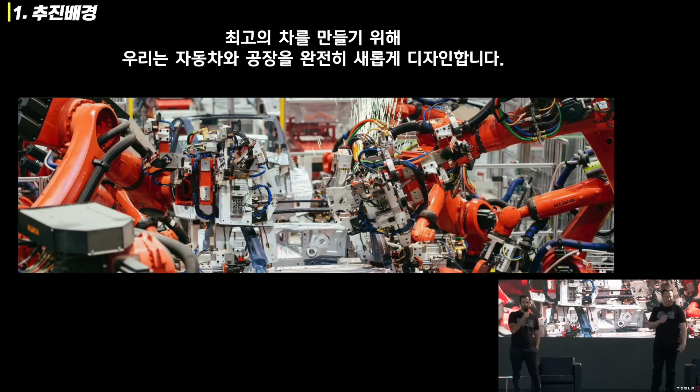EV market share is growing, but EVs still aren't accessible to all. And you can see, as Drew was saying, it's like starting to flatten out a little bit because the rate of improvement of the affordability of cars is just not fast enough. So that's why we got Battery Day. Yeah. To make the best cars in the world, we design vehicles and factories from the ground up. And now we do this for batteries as well. So let's get started. We have a plan to halve the cost per kilowatt hour. Yeah.

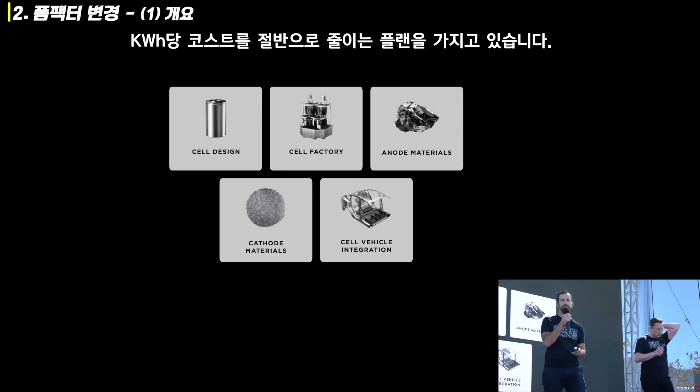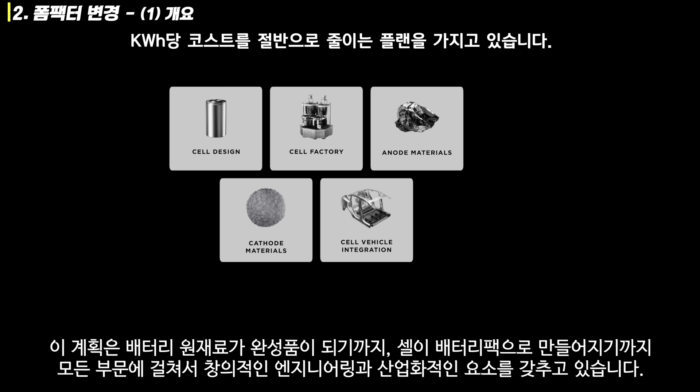And it's not a plan that rests on a single innovation, some research project that'll never see the light of day. It's a plan that has taken creative engineering and industrialization across every facet of what makes a cell into a battery pack, from raw material to the finished thing. And we're going to go through that plan with you today, step by step, and build up how we get to these goals and how we accelerate this transition and make our vehicles and our grid batteries more affordable.

I mean, we basically thought through every element of the battery, well, almost every element. There are a few more elements that we won't get to today, but we will get to in the future.

So first, before we get too far into it, let's talk about what is in a battery cell. We've got the cap and the can, negative and positive terminals of the cell. When you open that cell, you've got a tab connected to those terminals, what we call the jelly roll, which is the wound electrodes on the inside.

You can actually see what this looks like as you unwind it. This is over a meter long in a typical 2170 cell. So it's quite a long winding process. And you can see the tab still there.

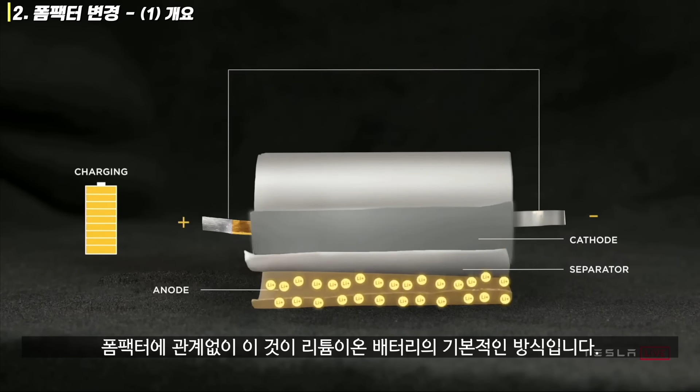And then, to explain what's actually going on here, we've identified anode, cathode, separator, positive and negative terminal. Discharge the cell, you've got lithium moving from anode to cathode. And then the reverse, when we charge the cell, lithium moving from cathode to anode across the separator. This is the basic of what makes all lithium-ion batteries, no matter what the form factor is.

And when we look at what's happened to date, at least in our products, we've moved from the 18650 form factor to the 2170 form factor through great collaboration with our partners, Panasonic, new partners like LG and CATL, and probably others in the future.

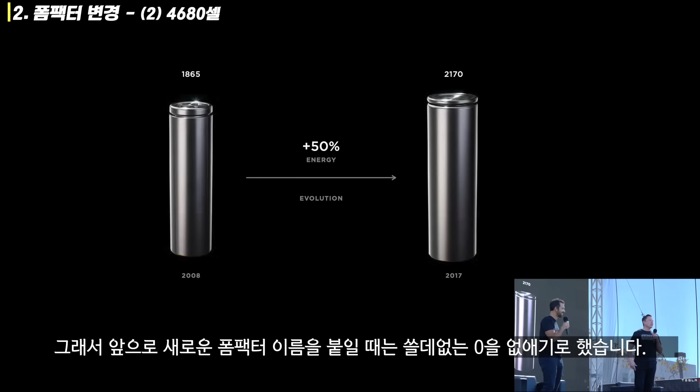Actually, a slight note on why it's called the 18650, although not on the slide, versus the 2170, is that the first two digits refer to the diameter, and the second two digits refer to the length. So that helps explain why these weird numbers. But nobody could explain to me why there was an extra zero. So I said, okay, well, we're deleting the zero that nobody can explain in future form factors. So technically it's like the 18650 bizarrely, but going forward it's the 2170 because we just got rid of the extra zero because it's pointless.

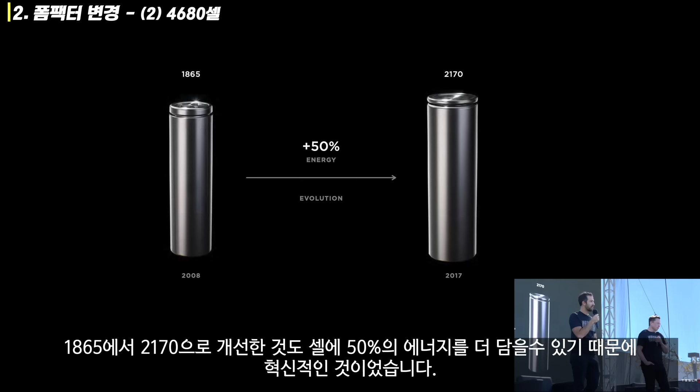This was an evolutionary step, going from 1865 to 2170, bringing 50% more energy into the cell. But when we look to the ideal cell design, if we were to do it ourselves, we need to go beyond just what's in front of us and study the full spectrum of options. So we swept the key figures of merit, how much we can reduce the cost, and how much vehicle range increases as we change the outer diameter of the cell. We found a sweet spot somewhere around 46 millimeters.

But it's not just about a bigger form factor. Like anybody could make a bigger form factor. Any fool could make a bigger form factor. We not any fool. Yeah, exactly.

There are problems as you make cells larger. In fact, supercharging and thermals in general become really challenging as you make bigger cells. And this was the challenge that our team set our sights on to overcome. And we did. We came up with this tabless architecture that maybe you've heard about, that basically removes the thermal problem from the equation and allows us to go to the absolute lowest cost form factor and the simplest manufacturing process.

This is what we mean when we talk about tabless. It's kind of a beautiful thing. Yeah, that's what these T-shirts mean, but it's very esoteric. It's like nobody could figure it out.

We basically took the existing foils, laser patterned them, and enabled dozens of connections into the active material through this shingled spiral you can see.

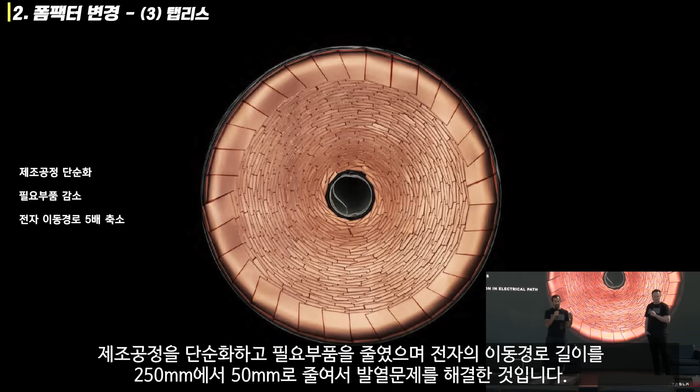With simpler manufacturing, fewer parts, 50 millimeter versus 250 millimeter electrical path length, which is how we get all the thermal benefits. This is important to appreciate. Basically the distance that electron has to travel is just much less. You actually have a shorter path length in a large tabless cell than you have in the smaller cell with tabs.

This is a big deal. So even though the cell is bigger, it actually has more power. The power to weight ratio is actually better than the smaller cell with tabs. This is quite hard to do.

Nobody's done it before. So it really took a tremendous amount of effort within Tesla engineering to figure out how do we make a freaking tabless cell and have it actually work and then connect that to the top cap. There's a whole bunch of things that we're keeping a little secret sauce here that we're not telling everything. But sometimes what's elegant and simple is still hard, and it took us a lot of trials, but we're happy where we ended up. Everything's simple in recollection. Everything is hard until it's discovered, and then it's simple.

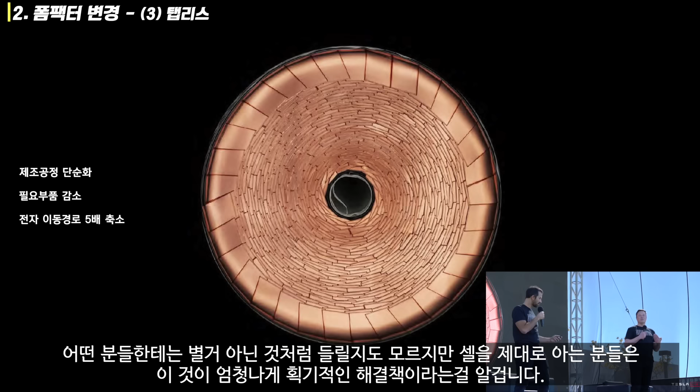But anyway, there's a lot of really cool things going on that enable tabless cells, and due to a really great engineering team, Drew and the rest of the team have done amazing work in achieving this tabless construction. I think it may sort of sound a bit silly to some people, but for people that really know cells, this is a massive breakthrough. For cylindricals to be able to get rid of the tabs dramatically simplifies winding and coating, and has an awesome thermal and performance benefit.

Elaborate on that a bit. It's like when the cell is going through the system, it has to keep stopping where all the tabs are. So you can't do continuous motion production if you have tabs. You have to keep stopping, and then there's a rate at which you can start and stop and accelerate again, and it really slows down the rate of production.

And then sometimes you get the tabs wrong, and you also lose a little bit of active area. It's really a huge pain in the ass to have tabs from a production standpoint. And so when we put it all together and go to our new 80 millimeter length, 4680, we call this new cell design, we get 5 times the energy with 6 times the power and enable a 16% range increase just from form factor alone.

And just to clarify, when we see these plus 16% or whatever the percentage range increases, these are the amounts due just to that particular innovation. So we'll list a whole bunch of innovations, and then when you add them up, you get a total improvement in energy density and cost. But these numbers refer to just this thing.

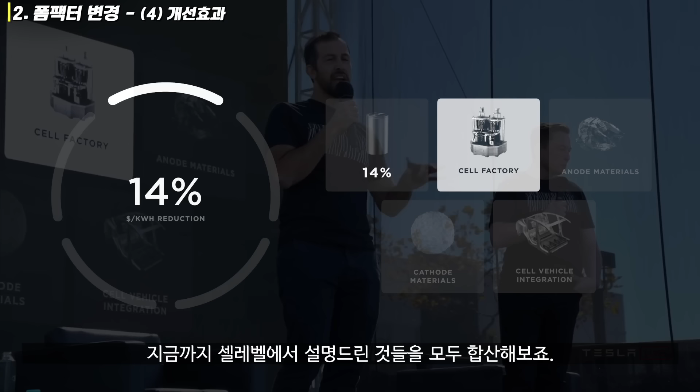But let's stack up everything we just saw at the cell level. Just the cell form factor change enables a 14% dollar per kilowatt hour reduction, just that cell form factor change. And now that you've been teased on this factory, we're going to go on and walk step by step through that factory and discuss a series of innovations there.

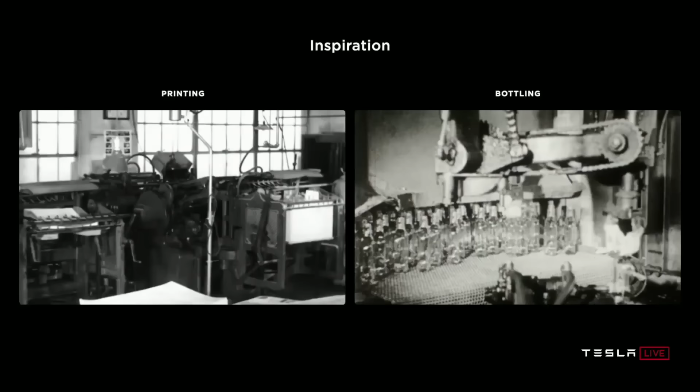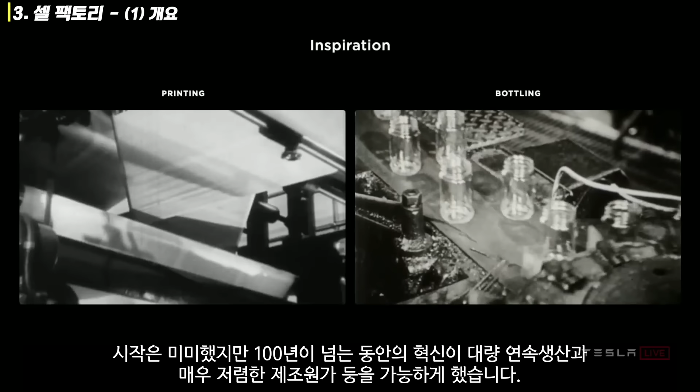When thinking about the ideal cell factory, we have inspirations behind us in the printing and bottling industry, where from humble beginnings, over a century of innovation has enabled mass-scale, continuous motion, unbelievably low manufacturing cost. And when we think about the lithium-ion industry, which is really only in its 3rd decade of high-volume production, it has so far to go to achieve similar scale and simplicity. That was the inspiration that we set out to the team as we thought about how to marry cell design and manufacturing in the best possible factory.

Let's talk a little bit about what's in a cell factory. First, there's an electrode process where the active materials are coated into films onto foils. Then those coated foils are wound in the winding process we just talked about, where if you do have tabs, you have to start and stop a lot. Then the jelly roll is assembled into the can, sealed, filled with electrolyte, and then sent to formation, where the cell is charged for the first time, and where the electrochemistry is set and the quality of the cell is verified. We set out at every step of this process to try to take that inspiration and think about how we make those processes fundamentally better and more scalable.

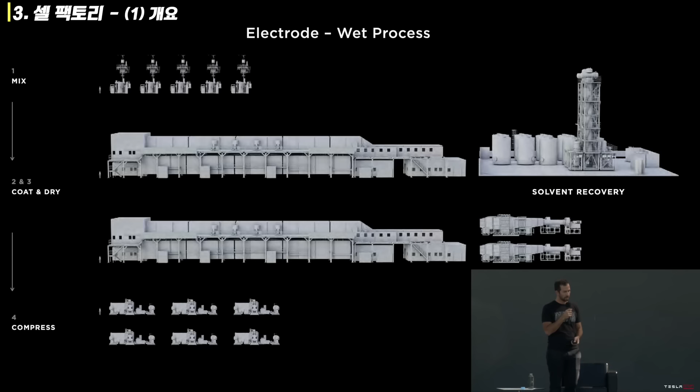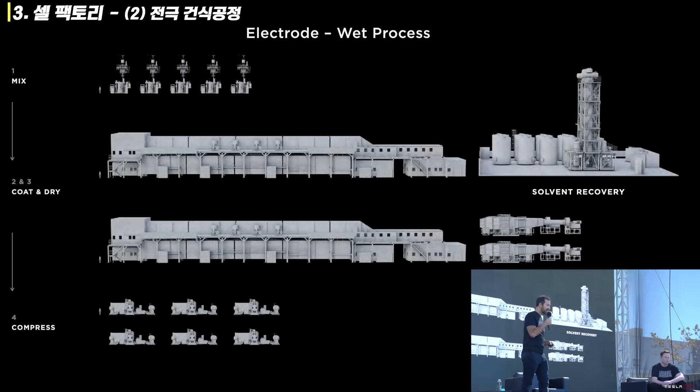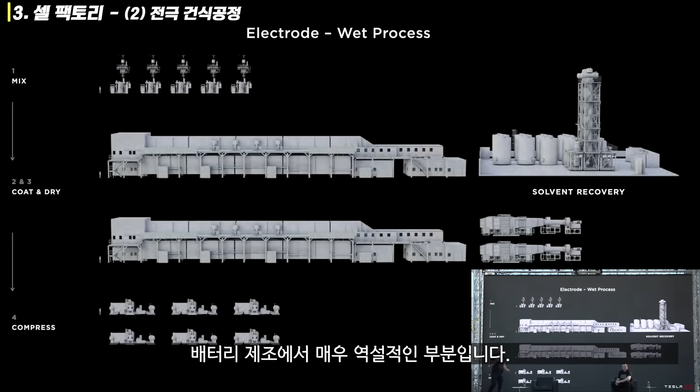One of the most important processes is where it all begins, the wet process of the electrode coating. Just to give you a sense of scale, I'm going to walk through what's in that wet process. You've got mixing where the powders are mixed with either water or solvents for the cathode. That mix then goes into a large coat and dry oven where the slurry is coated onto the foil, huge ovens, tens of meters long, dried, and that solvent then has to be recovered. You can see the solvent recovery system. Finally, the coated foil is compressed to the final density. When you're looking at this, you're like, wow, that's a lot of equipment for one step, especially when you consider that little speck next to the coating oven is a person. This is serious iron involved in making batteries.

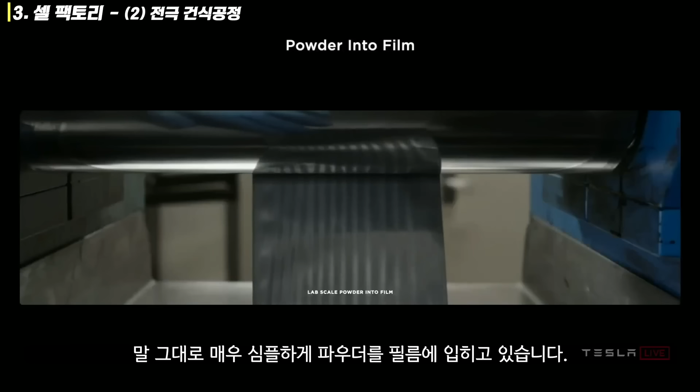Wouldn't it be great if we could skip that solvent step, which is one of those dig a ditch and then fill it kind of things, where you put the solvent in and then take it out and recycle it, and just go straight to dry mix to coat? That's what the dry process is really about. In the most basic form, you can see it here on a bench top. Literally, powder into film, as simple as that. I mean, it's hard, actually, to be clear. If this was easy, everyone would do it. So it's not like dry coating electrode is actually easy. It's actually very hard to do what appears to be a simple thing.

We did acquire Maxwell a little over a year ago, I guess. It's certainly a good company, but the dry coating they had was like, I would call it proof of concept. Since the acquisition, we've actually revved the machine that does the dry coating 4 times. So we're on revision 4 post acquisition of the machine, and there's still a lot of work to do. I would not say this is completely in the bag. There's still a lot of work to do, and as you go from bench top to lab to pilot to volume production, there are actually major issues that you encounter at every level. It's not like you make something work on your bench and bingo, now you can make a bazillion of it. Absolutely, it's insanely difficult to scale up.

But if you do scale it up, what you saw before becomes this. So you can see the motivation: a 10 times reduction in footprint, a 10 times reduction in energy, and a massive reduction in investment. But as Elon was saying, simple is hard.

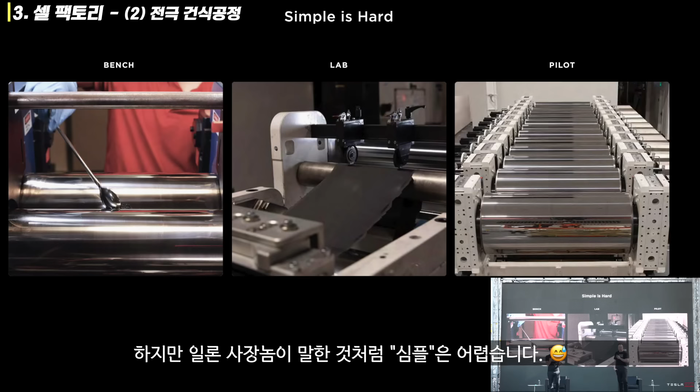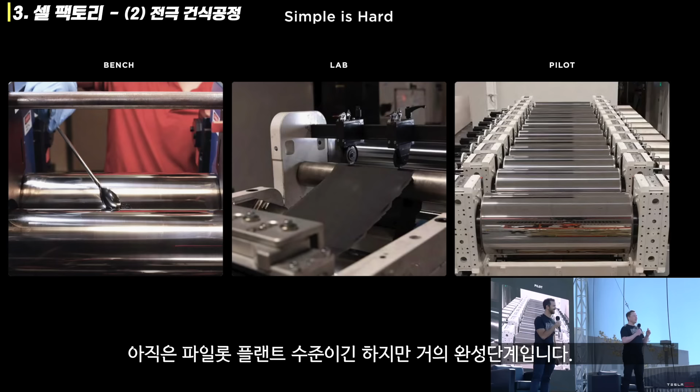Yeah, I mean, to be clear, I would not say that right now it's just totally working. It's close to working, but even now, at the pilot plant level, it is close to working. Well, it's fair to say it does work, but with not a high yield. Yeah, so we're still ironing out the kinks, but we've made tens of thousands of cells, thousands of kilometers of electrode. We are on the 4th generation of the equipment, so we've learned a lot along the way.

It's super demanding because every atom has its place if you want to deliver the energy density, the cycle life, and the supercharging. But we're confident that we will get there, though it will be a lot of work along the way. There's a clear path to success, but a ton of work between here and there.

This is a really profound improvement. Again, for people that know battery manufacturing, this is gigantic. We'll probably be on machine revision 6 or 7 by the time we do large-scale production. The rate at which the machines are being improved is extremely rapid, literally every 3 or 4 months is a new rev.

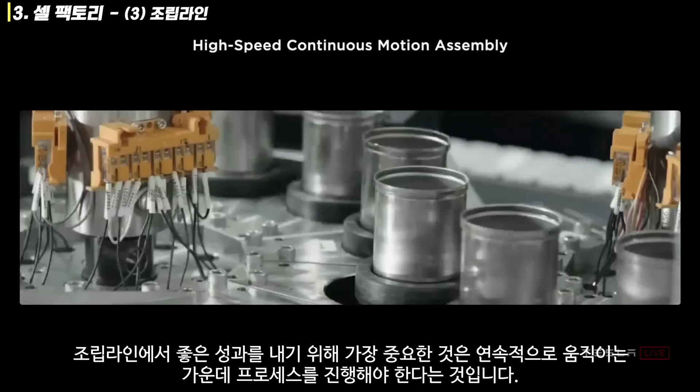Beyond the electrode, we continue to innovate on every other process step. So let's talk a little bit about assembly, which is next. The key to a high-performing assembly line is accomplishing processes while in continuous motion, thinking of the line as a highway: max velocity down the highway, no start and stop, no city driving. Exactly, no stoplights or traffic lights or anything.

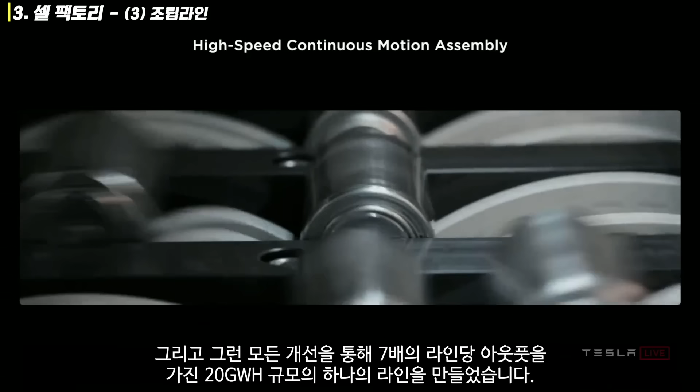Together with our internal design team that makes and designs this equipment, we coupled thinking about how to make the best cell with thinking about how to make the best equipment, so that we could accomplish the fastest parts-per-minute rates on all of these tools. Through all of that development, we were able to get to the point where we can implement assembly lines: one line, 20 gigawatt hours, a 7 times increase in output per line.

When you're thinking about scalability and pure effort, having one line be 7x the capability is just effort multiplying.

You can think about the fundamental physics of a factory almost like the rocket equation, where you've got your exhaust velocity and the log of the start and end masses. It's basically saying how fast are things going, and what percentage of the factory volume is doing useful work. Conveyance does not count as useful work, so only the value-added steps matter.

If you break the factory down into cubic meter sections, or smaller, say one liter sections, and ask is a majority of this volume doing useful work, you'd be astounded at how bad most factories are. They're maybe 2 or 3%, including our factory in Fremont. I think it's possible to get to at least 10 times that volumetric efficiency, more like 30% ish, maybe more, which means the factory can be 10 times smaller.

The other thing is how fast things go through the factory, it's speed and density. The faster you go, a factory moving at twice the speed of another is basically equivalent to two factories. The company that will be successful is the one that with one factory can accomplish what other companies take 2, 3, or 4 factories to do. So what we're trying to do here is say, okay, how do we with one factory achieve what maybe 5 or even 10 factories would normally be required to achieve?

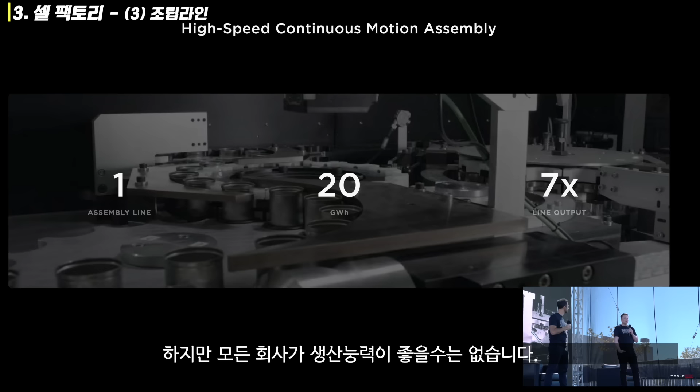Basically, Tesla is aiming to be the best at manufacturing of any company on Earth. This is the thing that's actually most important in the long run, I think, just from a company standpoint and from achieving sustainability as fast as possible. But I think also for long-term competitiveness, eventually every car company will have long-range electric cars, eventually every company will have autonomy, but not every company will be great at manufacturing. Tesla will be absolutely head and shoulders above anyone else in manufacturing. That is our goal.

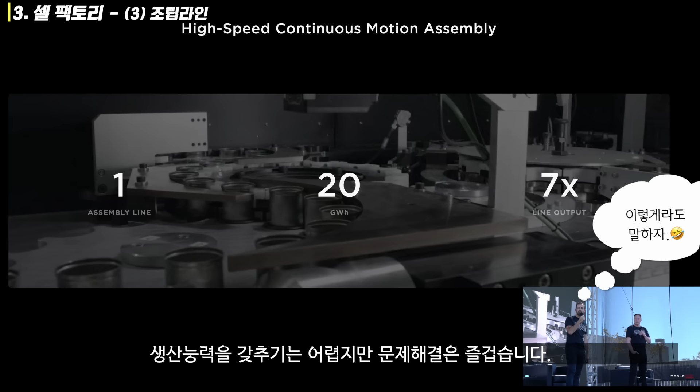Manufacturing is hard, and hard problems are fun to solve. Okay, now let's talk about formation.

In a typical cell factory, formation represents 25% of the investment. And what is formation? It's charging and discharging cells and verifying the quality of the cell. Turns out we've charged and discharged billions and billions of cells in our vehicles, so we know a thing or two about that. The typical formation setup is you charge and discharge each cell individually.

In our car, we charge thousands of cells at once. And we took our principle and our power electronics, leveraging Powerwall, vehicle battery management systems, and others, to dramatically improve the formation equipment cost effectiveness and density. That's an 86% reduction in formation investment, and a 75% reduction in footprint.

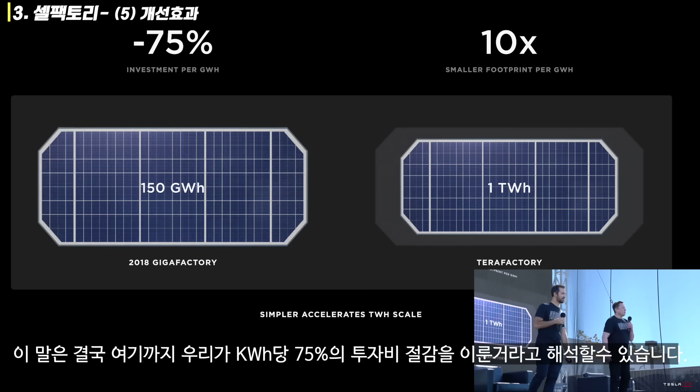So essentially, what this translates to, based on what we know today, is about a 75% reduction in the investment per kilowatt hour or gigawatt hour. It's basically 4 times better than the current state of the art, to the best of our knowledge. And I think there's probably room to improve even beyond that.

Definitely, yeah. We're able to, from a volume standpoint, actually get in a smaller form factor than Giga Nevada. We were able to get many times the cell output. So you can see, basically, we can get a terawatt hour in less space than it took to make a gigawatt hour, 150 gigawatt hours. So this is pretty profound.

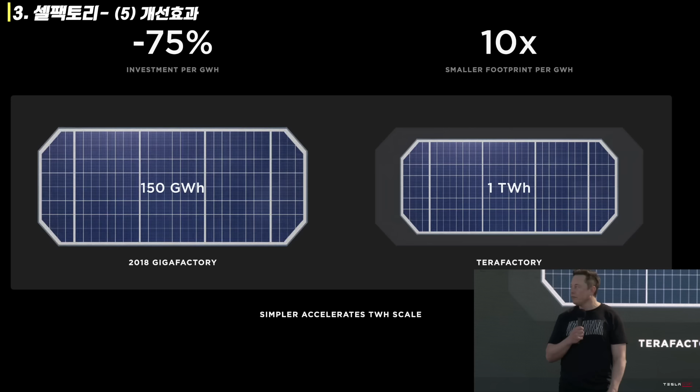It's like I would actually not have thought this was possible several years ago, that we could actually get to terawatt hour scale in less space than what we currently envision for doing 150 gigawatt hours. Yes, simpler accelerates terawatt hour scale, and that's what we need to do to accelerate our mission.

This is just talking about Tesla internal cell production. As I tweeted out earlier, we will continue to use our cell suppliers, Panasonic, LG, and CATL. Essentially, this does reduce our weighted average cost of a cell, because it allows us to make a lot more cars and a lot more stationary storage.

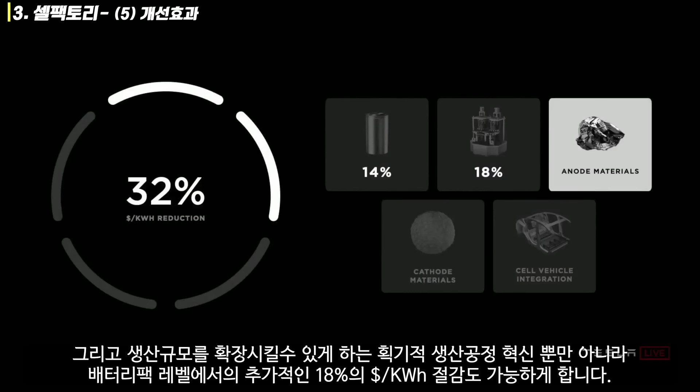And not only is all of that manufacturing innovation fantastic for enabling scale, it's also an additional 18% reduction in dollar per kilowatt hour at the battery pack level. But wait, there's more. But wait, there's more.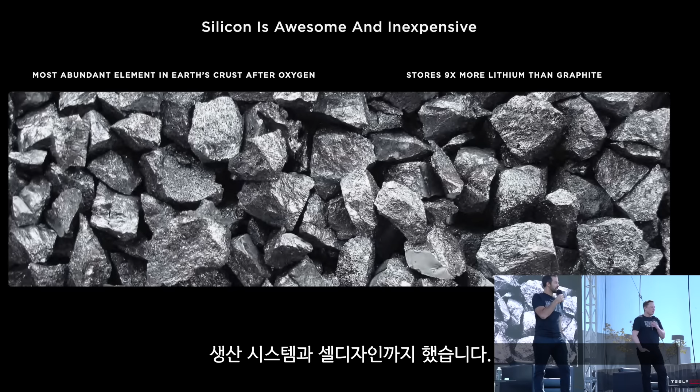So we have a manufacturing system. We've got a cell design. What are the active materials we're going to put in that cell design? Let's talk about the anode first. Let's talk about silicon. Why is silicon awesome?

It's awesome because it's the most abundant element in the Earth's crust after oxygen, which means it's everywhere. It's sand. Sand is silicon dioxide. And it happens to store 9 times more lithium than graphite, which is the typical anode material in lithium-ion batteries today. So why isn't everybody using it?

The main reason is because the challenge with silicon is that it expands 4x when fully charged with lithium. And basically, all of that expansion stress on the particles starts cracking them, they start electrically isolating, you lose capacity, the energy retention of the battery starts to fade. And current approaches to solve this, which exist—I mean, we have silicon in the cars that you're all in right now—involve highly engineered, expensive materials.

In the scheme of things, they're still great, and they enable some of the benefits of silicon. They just don't enable all of it, and they're not scalable enough. You can see some of the things that maybe you've heard of, SiO, silicon with carbon, or silicon nanowires. That's kind of the space right now.

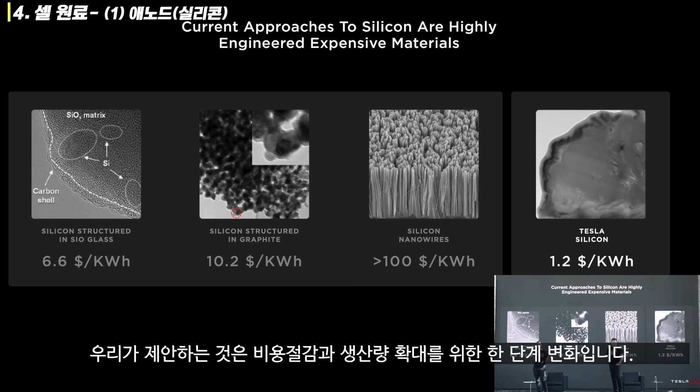What we're proposing is a step change in capability and a step change in cost. And what that really is, is to just go to the raw metallurgical silicon itself. Don't engineer the base metal. Just start with that and design for it to expand in how you think of the particle in the electrode design and how you coat it.

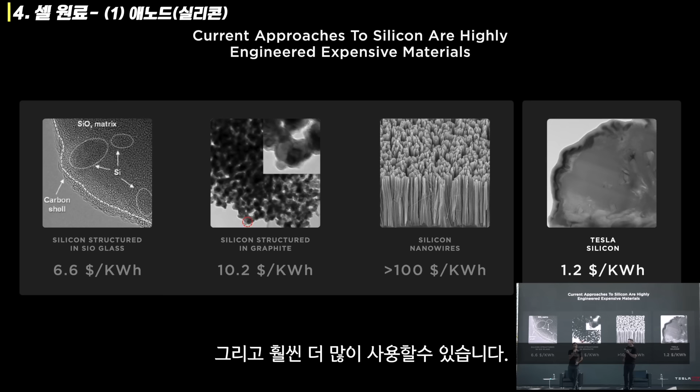Yeah, I'm not sure if you saw this. Basically, $1 per kilowatt hour. Yeah, basically, if you use simple silicon, it's dramatically less than even the silicon that is currently used in the batteries that are made today, and you can use a lot more of it. The anode would cost, with this silicon, $1.20 a kilowatt hour.

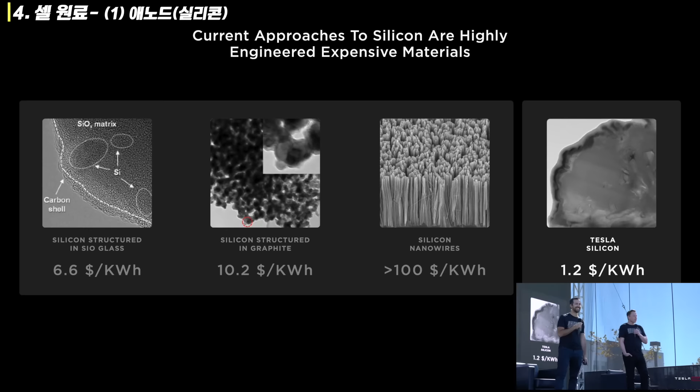Yeah. And how does it work? Start with raw metallurgical silicon, stabilize the surface with an elastic ion-conducting polymer coating that is applied through a very scalable approach. No chemical vapor deposition, no highly engineered high capex solutions, and then integrated into the electrode through a robust network formed out of a highly elastic binder.

And in the end, by leveraging this silicon to its potential, we can increase the range of our vehicles by an additional 20%, just this improvement. Yeah, it gets cheaper and longer range. Yeah, and when we take that anode cost reduction, we're looking at another 5% dollar per kilowatt hour reduction at the battery pack level. Let's talk about cathodes.

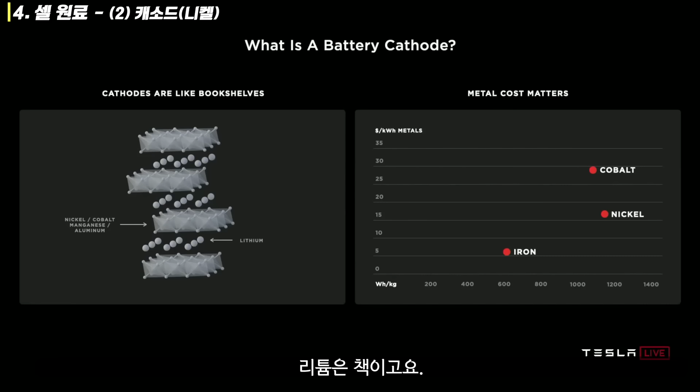What is a battery cathode? Cathodes are like bookshelves, where the metal, the nickel, the cobalt, the manganese, or aluminum is like the shelf, and the lithium is the book. And really, what sets apart these different metals is how many books of lithium they can fit on the shelves and how sturdy the shelves are. Cobalt is a... Yeah, sorry, I was just going to say, it's tough to exactly figure out what the right analogy is to explain cathode and anode, but a bookshelf is probably a pretty good one, in the sense that you need a stable structure to contain the ions.

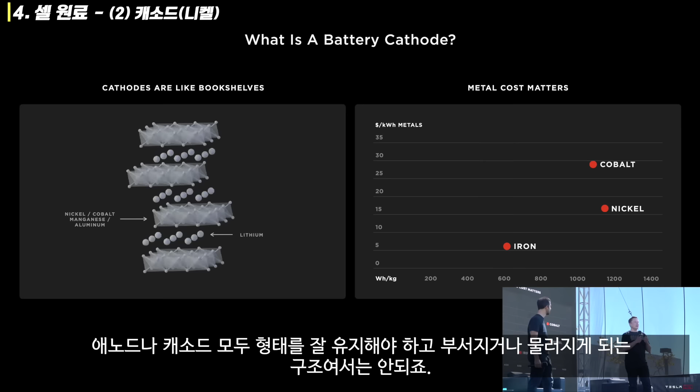So you want a structure that does not crumble or get gooey, or basically that holds its shape in both the cathode and the anode. As you're moving these ions back and forth, it needs to retain its structure. So if it doesn't retain its structure, then you lose cycle life and your battery capacity drops very quickly. People are always talking about what's the cathode going to be? Is it NCA or whatever?

The thing to consider is just fundamentally what the metals are capable of, and that's what we have on the chart here. Dollar per kilowatt hour cathode of just the metal, using just LME, London Metal Exchange prices, versus the energy density of just the cathode. And you can see nickel is the cheapest and the highest energy density, and that's why increasing nickel is a goal of ours and really everybody's in the battery industry.

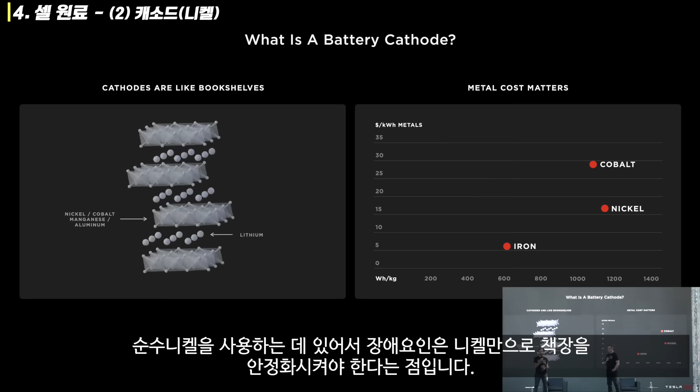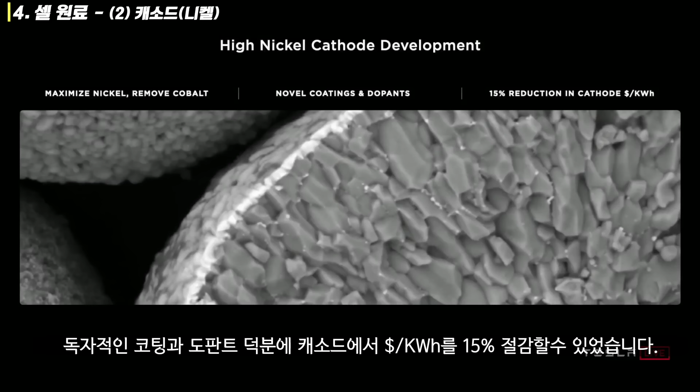But one of the reasons why cobalt is even used at all is because it is a very stable bookshelf. And the challenge with going to pure nickel is stabilizing that bookshelf with only nickel. And that's what we've been working on with our high nickel cathode development, which has 0 cobalt in it. Leveraging novel coatings and dopants, we can get a 15% reduction in cathode dollar per kilowatt hour. Yeah. Big deal.

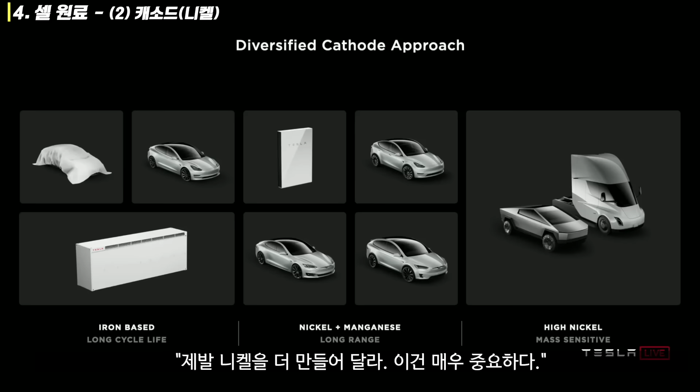But it's not just about nickel. In order to scale, we really need to make sure that we're not constrained by total nickel availability. I actually spoke with the CEOs of the biggest mining companies in the world and said, please make more nickel. It's very important. And so I think they are going to make more nickel.

I think we need to have a kind of a 3-tiered approach to batteries. So starting with iron, that's kind of like a medium range, and then nickel manganese as sort of a medium plus, intermediate, and then a high nickel for long range applications like Cybertruck and the semi. Because something like a semi truck, it's extremely important to have high energy density in order to get long range.

If you look at the watt-hours per kilogram at the cathode level of iron, it looks like nickel's twice as good. But when you fully consider it at the pack level, everything else taken into account, nickel is maybe 50 or 60% better than iron. So iron is a little better than it would seem when you look at it at the pack level fully considered. It's not as good as nickel, but it's actually pretty good. And so good for stationary storage and for medium range applications where energy density is not paramount.

And then, like I said, for intermediate, it's kind of a nickel manganese, and it's relatively straightforward to do a cathode that's 2/3 nickel, 1/3 manganese, which would then allow us to make 50% more cell volume with the same amount of nickel. And with very little energy trade-off. Just enough that you still want to use 100% nickel for something like a semi-truck, but really not much of a sacrifice at all.

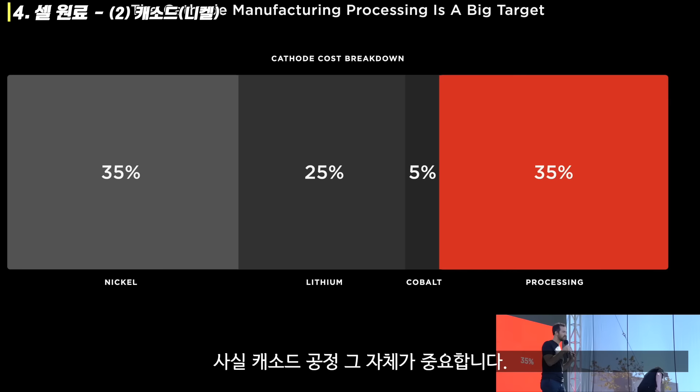35% of the cathode dollar per kilowatt hour is just in transferring it into its final form. And so we see that as a big target, and we decided to take that on. Here's a view of the traditional cathode process. Effectively, if you start at the left and you have the metal from the mine, the first thing that happens is the metal from the mine is changed into an intermediate thing called a metal sulfate, because that just happened to be what chemists wanted a long time ago.

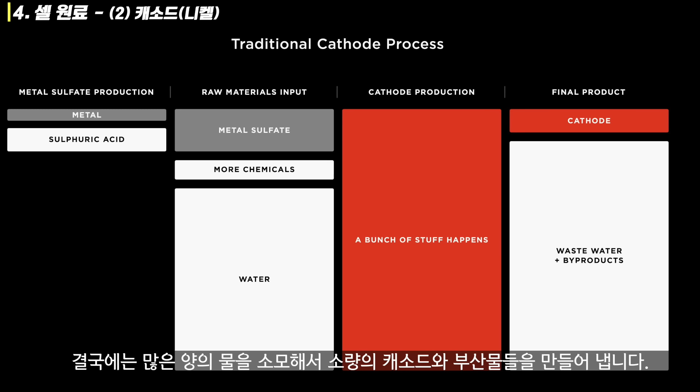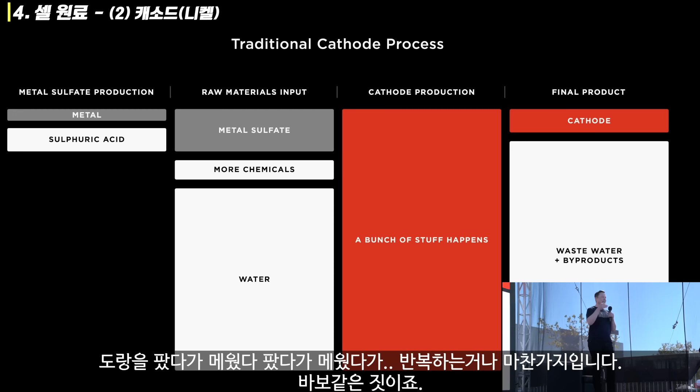And then when you're making the cathode, you have to take this intermediate thing called metal sulfate, add chemicals, add a whole bunch of water, a whole bunch of stuff happens in the middle, and at the end, you get that little bit of cathode and a whole bunch of wastewater and byproducts. Yeah, it's insanely complicated. It's a small world journey of I am a nickel atom. What happens to me? And it's crazy. Like you're going around the world 3 times. There's like the moral equivalent of dig the ditch, fill in the ditch, and dig the ditch again. It's total madness, basically.

And these things just grew up as kind of legacy things, like how it was done before. And then they connected the dots, but really didn't think of the whole thing from a first principles standpoint, saying how do we get from the nickel ore in the ground to the finished nickel product for a battery. And so we've looked at the entire value chain and said, how can we make this as simple as possible? And that's what we're proposing here with our process.

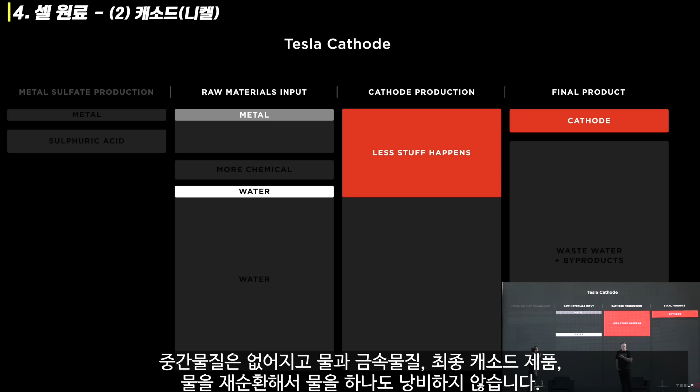As you can see, a whole lot less is going on here. We get rid of the intermediate: metal, water, final product cathode, recirculate the water, no wastewater at all. And when you summarize all of that, it's a 66% reduction in CapEx investment, a 76% reduction in process cost, and 0 wastewater. Much more scalable solution. Yeah.

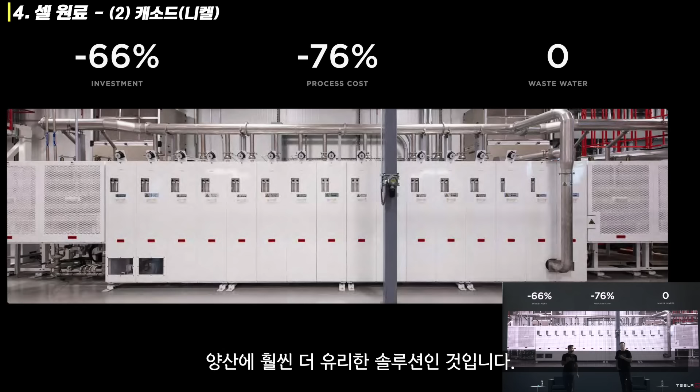And then when you think about the fact that now we're actually just directly consuming the raw metal nickel powder, it dramatically simplifies the metal refining part of the whole process. So we can eliminate billions in battery-grade nickel intermediate production. It's not needed at all. And we can also use that same process we showed on the previous page to directly consume the metal powder coming out of recycled electric vehicle and grid storage batteries. So this process enables both simpler mining and simpler recycling.

And now that we have this process, obviously we're going to go and start building our own cathode facility in North America and leveraging all of the North American resources that exist for nickel and lithium. And just by localizing our cathode supply chain and production, we can reduce miles traveled by all the materials that end up in the cathode by 80%, which is huge for cost. Yeah, to be clear, cathode production would be part of the Tesla cell production plant.

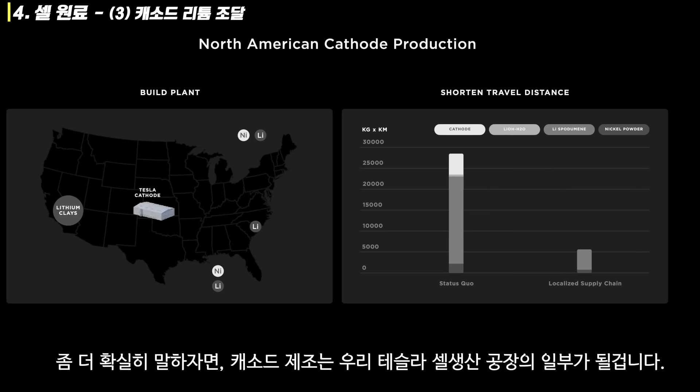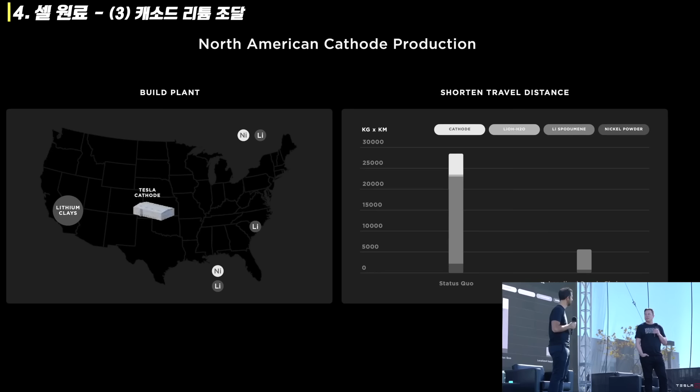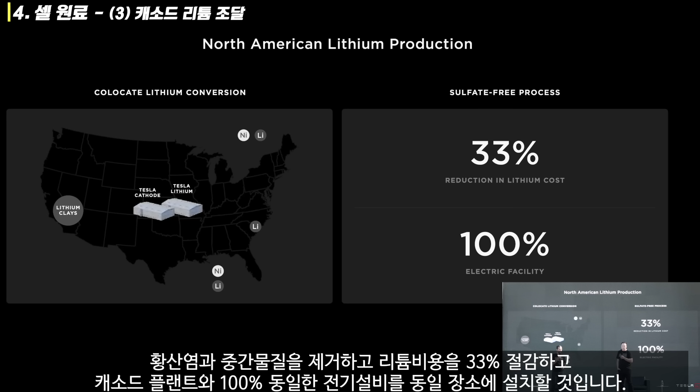So it would just be, basically, raw materials coming from the mine, and out comes a battery. The way the lithium ends up in the cell is through the cathode, so then we should obviously do on-site lithium conversion as well, which is what we will do using a new process that we're going to pioneer. That's a sulfate-free process, again, skip the intermediate. 33% reduction in lithium cost, 100% electric facility co-located with the cathode plant. Yeah.

So it's important to note that there is a massive amount of lithium on Earth. Lithium is not like oil. There's a massive amount of it pretty much everywhere. In fact, there's enough lithium in the United States to convert the entire United States fleet to electric, like all the cars in the United States, there's like 300 million or something like that. Every vehicle in the United States can be converted to electric using only lithium that is available in the United States, discovered today, what we already know exists. People really haven't even been looking because it's just widely available.

But it is important to ask, what is the smartest way to take the ore and extract the lithium and do so in an environmentally friendly way? And we actually discovered, again looking from a first principles physics standpoint instead of just the way it's always been done, that we can actually use table salt, sodium chloride, to basically extract the lithium from the ore.

Nobody's done this before. To the best of my knowledge, nobody's done this. And all the elements are reusable. It's a very sustainable way of obtaining lithium. And we actually got rights to a lithium clay deposit in Nevada. Over 10,000 acres.

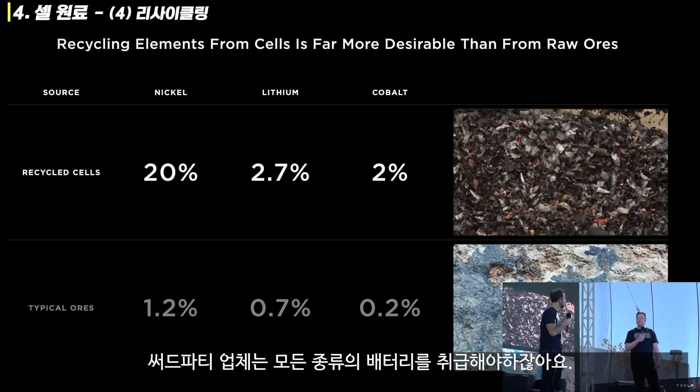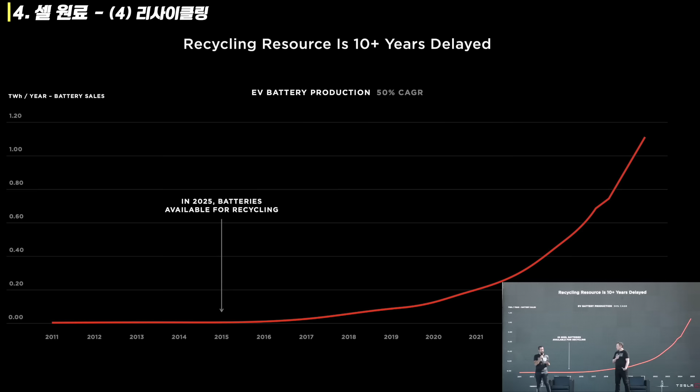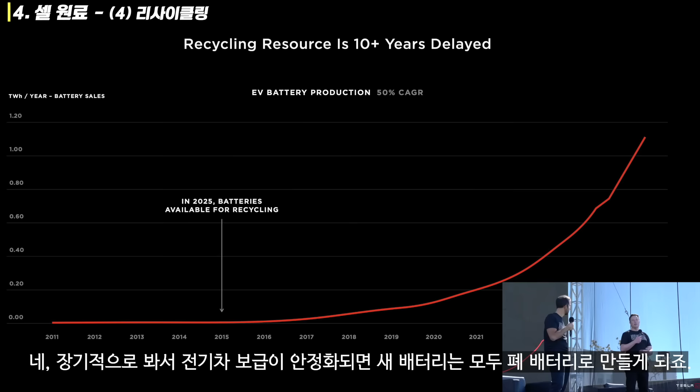Yeah, and just to think about what this actually means, the recycling resource is always 10 or greater years delayed because batteries last a really long time. But eventually, it is the way that all resources will be made available, and that's why we're investing in this recycling facility in Nevada. Yeah. Long-term, new batteries will come from old batteries once the fleet reaches steady state.

Right. Okay, so we just talked about scaling cathode and recycling. All of the benefits that you just saw are added to this benefit of a 12% reduction in dollars per kilowatt hour at the battery pack level. Almost at our half the cost goal, but there's one more section. Take it away, Elon. Great.

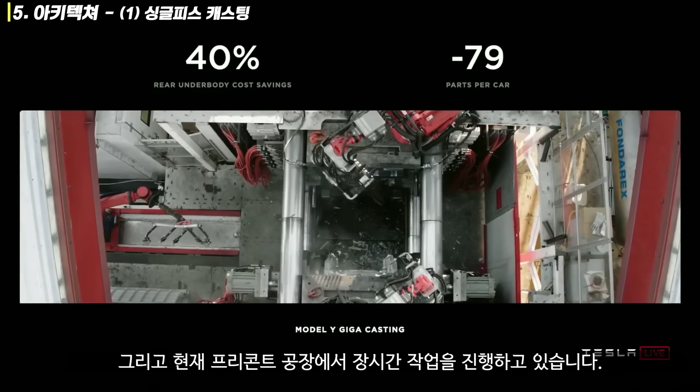So there's an architecture that we've been wanting to do at Tesla for a long time, and we finally figured it out, and I think it's the way that all electric cars in the future will ultimately be made. It's the right way to do things. So it starts with having a single piece casting for the front body and the rear body. And in order to do this, we commissioned the largest casting machine that has ever been made, and it's currently working just over the road at our Fremont plant. It's pretty sweet.

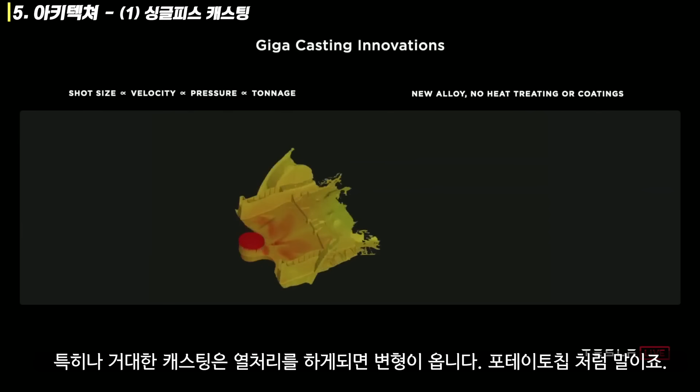Currently making the entire rear section of the car as a single piece, high pressure die cast aluminum. And in order to do this, we actually had to develop our own alloy because we wanted a high strength casting alloy that did not require coatings or heat treatment. This is a big deal for castings, especially with a large casting. If you heat treat it afterwards, it tends to deform. It kind of does this potato chip thing. So it's very hard to keep a large casting to have its shape. There was no alloy that existed that could do this. So we developed our own alloy, a special alloy of aluminum that has high strength without heat treat and is very castable.

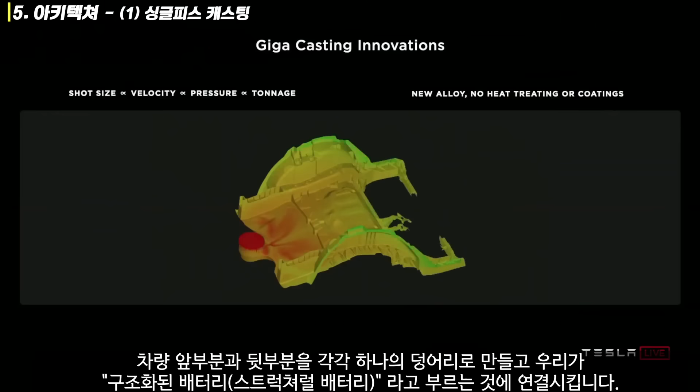So that's a great achievement of our materials team. In fact, in general, we've got a lot of advanced materials coming for Tesla, new alloys and materials that have never existed before. So you're basically making the front and rear of the car as a single piece, and that then interfaces to what we call the structural battery, where the battery for the first time will have dual use.

The battery will both have the use as an energy device and as structure. This is absolutely the way things are done. In the early days of aircraft, they would carry the fuel tanks as cargo. The fuel tanks actually were quite difficult to carry. They were basically worse than cargo. You had to kind of bolt them down. It was very difficult. And then somebody said, 'Hey, what if we just make the wing tanks? What if we just make the fuel tank in wing shape?' All modern airplanes, the fuel tank, your wing is just a fuel tank in wing shape.

This is absolutely the way to do it. And then the fuel tank serves as dual structure, and it's no longer cargo. It's fundamental to the structure of the aircraft. This was a major breakthrough. We're doing the same for cars.

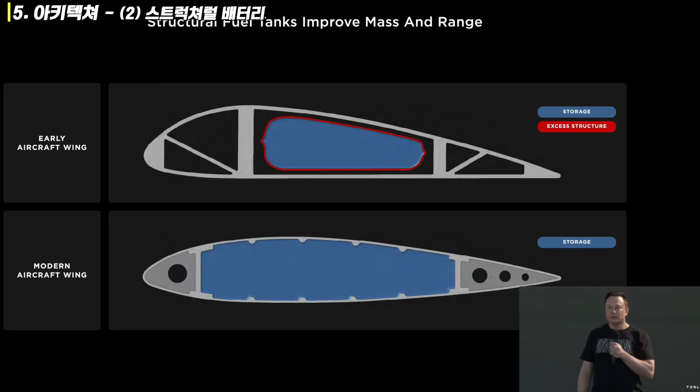This is really quite profound. Effectively, the non-cell portion of the battery has negative mass. So we save so much mass in the rest of the vehicle. We save more mass in the rest of the vehicle than the non-cell portion of the battery. It's like, well, how do you really minimize the mass of a battery? Make it negative. Make the non-cell portion of the battery pack negative.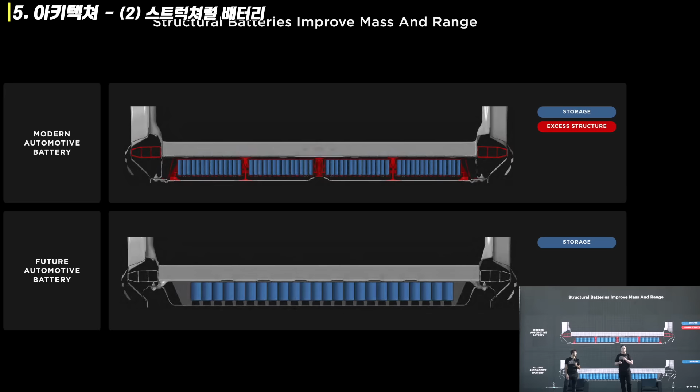It also allows us to pack the cells more densely because we do not have intermediate structure in the battery pack. Instead of having supports and stabilizers and stringers and structural elements in the battery, we now have a lot more space because the pack itself is structural. Instead of having just a filler that is a flame retardant, which is currently what is in the 3 and Y battery packs, we have a filler that is a structural adhesive, as well as flame retardant. So it effectively glues the cells to the top and bottom sheet, and this allows you to do shear transfer between the upper and lower sheet.

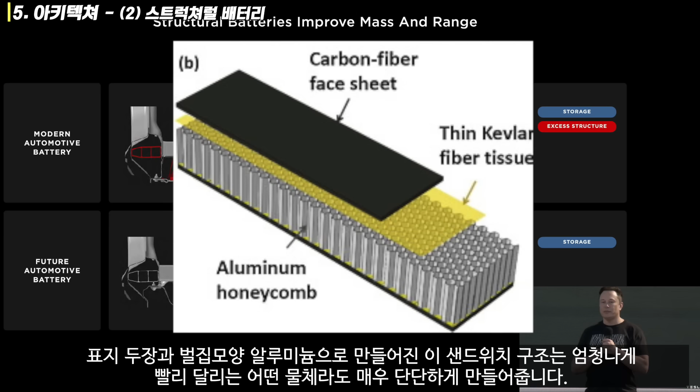Just like if you have a Formula One craft or a racing boat, with carbon fiber face sheets and aluminum honeycomb between them, this gives you incredible stiffness, and it's really the way any super fast thing works. You create basically a honeycomb sandwich with two face sheets. This is actually even better than what aircraft do, because aircraft can't do this, since fuel is liquid. In our case, the batteries are solid, so we can actually use the steel shell case of the battery to transfer shear from the upper and lower face sheet, which makes for an incredibly stiff structure, even stiffer than a regular car.

In fact, if this was a convertible that had no upper structure, that convertible would be stiffer than a regular car. So it's just really, really major.

So it improves the mass efficiency of the battery, and then those castings are also quite important because you want to transfer load into the structural battery pack in a very smooth, continuous way, so you don't put arbitrary point loads into the battery. You kind of have to feather the load out from the front and rear into the structural battery.

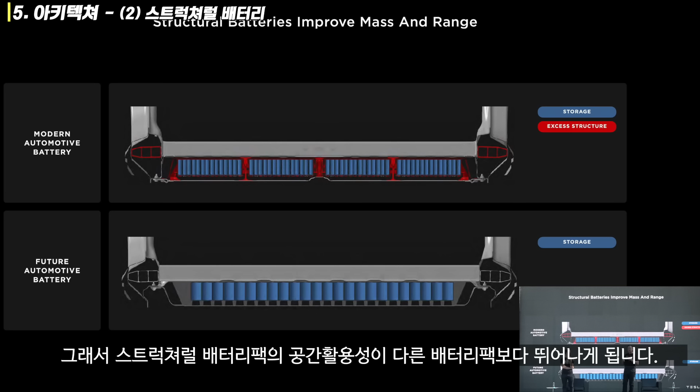It also allows us to move the cells closer to the center of the car, because we don't have all the supports and stuff. So the volumetric efficiency of the structural pack is much better than a non-structural pack, and we actually bring the cells closer to the center, and because they're closer to the center, it reduces the probability of a side impact potentially contacting the cells, because any kind of side impact has to go further in order to reach the cells.

It also improves what's called the polar moment of inertia, which is like when an ice skater has arms out or arms in. Arms in, you rotate faster. So if you can bring things closer to the center, you reduce the polar moment of inertia, and that means the car maneuvers better. It just feels better. You don't know why, but it just feels more agile. This is really major.

Like I said, 10% mass reduction in the body of the car, 14% range increase, and 370 fewer parts.

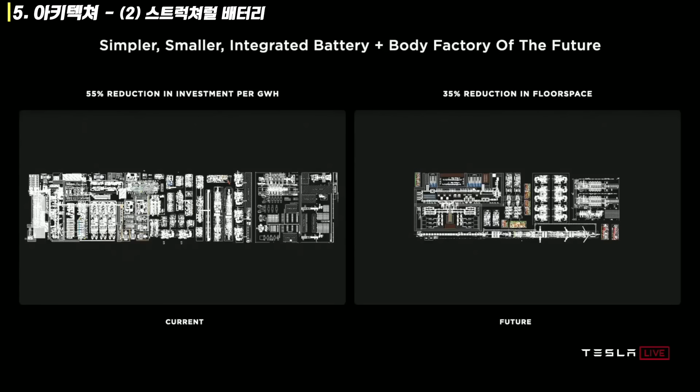I really think that long term, any cars that do not take this architecture will not be competitive. And it's not just at the product level, a better product, but in the factory it's a massive simplification. You saw the part removal, the casting machines, the structural battery pack. So we're looking at over 50% reduction in investment per gigawatt hour, 35% reduction in floor space, and we'll continue to improve that as we make the vehicle factory of the future.

Major improvements on all fronts, from the cell all the way to the vehicle. In addition to the improvements we just said on enabling additional range and improving the structural performance of the vehicle, it is worth another 7% dollar per kilowatt hour reduction at the battery pack level, bringing our total reductions now to 56% dollars per kilowatt hour.

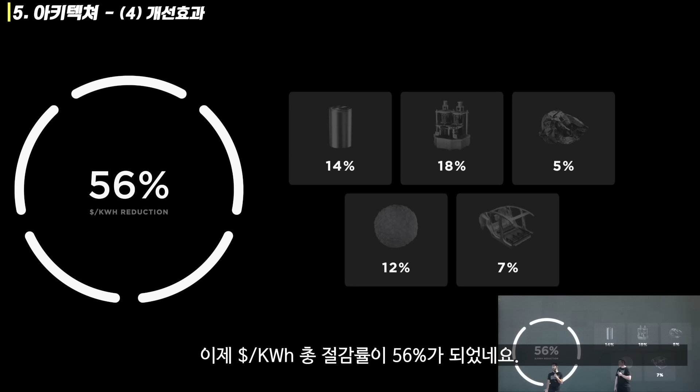So stacking it up, we're not just talking about cost or range, we've got to look at all the facets. Range increase: we're unlocking up to 54% increase in range for our vehicles and energy density for our energy products. 56% reduction in dollars per kilowatt hour at the battery pack level, and a 69% reduction in investment per gigawatt hour, which is the true enabler when we talk about how we achieve this scale problem.

I think it's pretty nice that the investment per gigawatt hour reduction is 69%. I mean, who would have thought? Yeah, it just happened to happen out that way. I mean, 0.420%, of course.

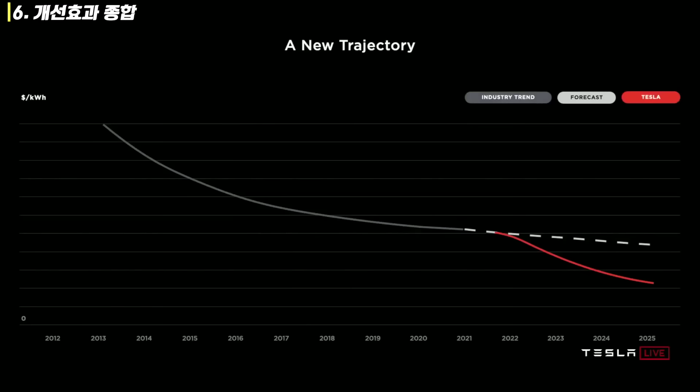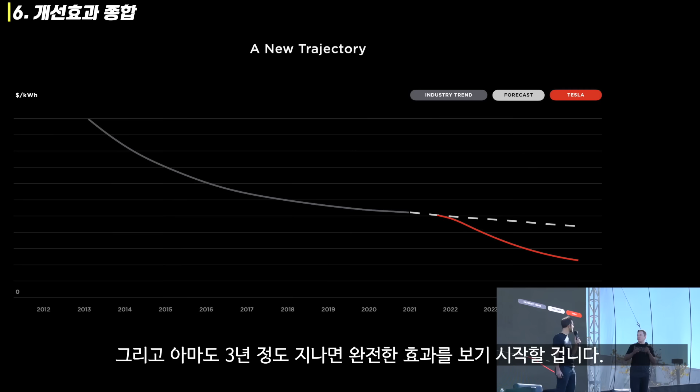So what this enables us to do is achieve a new trajectory in the reduction of cell cost. To be clear, it will take us probably a year to 18 months to start realizing these advantages, and probably to fully realize them, it's about 3 years or thereabouts. It's not like if we could do this instantly, we would. But I think what this bodes for is that the long-term scaling of Tesla and the sustainable energy products we make will be massively increased.

What tends to happen as companies get bigger is things tend to slow down. Actually, they're going to speed up. And they have to speed up if we're going to accelerate the transition to sustainable energy. Long term, we want to try to replace at least 1% of the total vehicle fleet on Earth, which is about 2 billion vehicles. So long term, we want to try to make about 20 million vehicles a year.

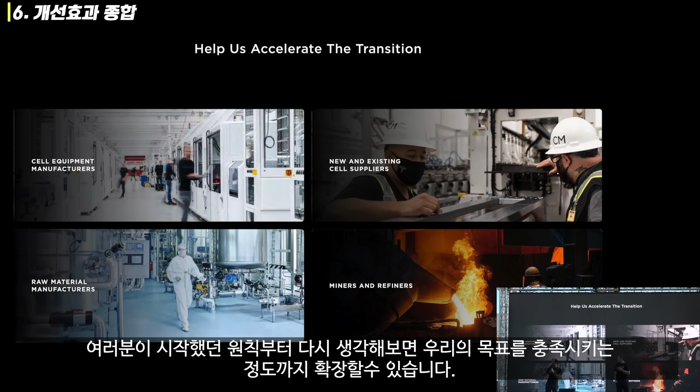But I think it's important to point out that when we talked about 3 terawatt hours by 2030, the problem is actually a 20 terawatt hour problem. So everybody needs to be accelerating their efforts to accomplish these objectives. Doesn't matter where you are in the value chain, there is a ton to do. You need to rethink from first principles how you do it so that you can scale to meet all of our objectives.

What does this mean for our future products? We're confident that long term we can design and manufacture a compelling $25,000 electric vehicle.

This has always been our dream from the beginning of the company. I even wrote a blog piece about it, because our first car was an expensive sports car, then a slightly less expensive sedan, and finally it's sort of a mass market premium, like the Model 3 and Model Y. But it was always our goal to try to make an affordable electric car, and I think, like I said, about 3 years from now, we're confident we can make a very compelling $25,000 electric vehicle that's also fully autonomous. And when you think about the $25,000 price point, you have to consider how much less expensive it is to own an electric vehicle.

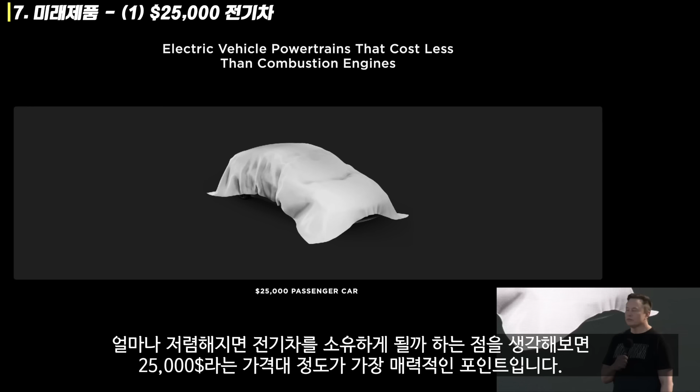So actually, it becomes even more affordable at that $25,000 price point. So we have extreme performance and range, and we should probably talk about the Model S Plaid. What about that?